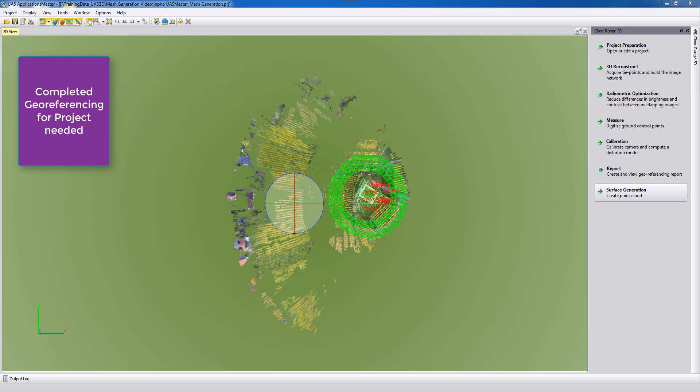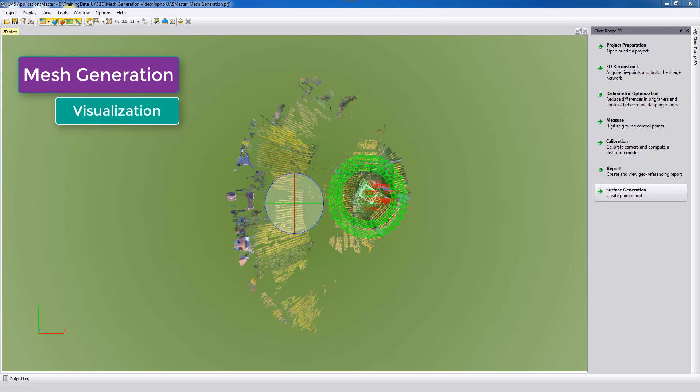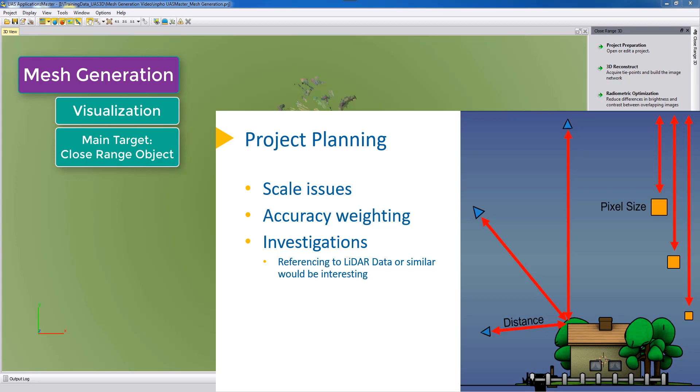The mesh generation is typically extracted for visualization projects. Often we have an object of interest, so we don't fly it as an area mapping project and want to cover as much space as possible, but we fly around an object that we are interested in, and we fly with different heights and scales, and therefore our photos have different ground sample distance.

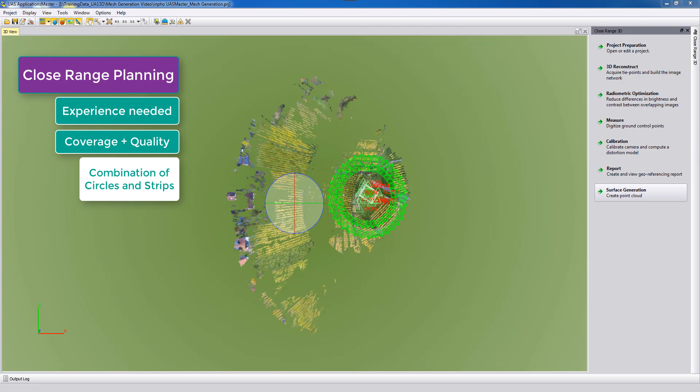Most of the planning software you have for the drones have good planning for area mapping, and also you can just run a circle and define an object in the center that you want to fly around, but coverage for these objects and also quality is in most cases not given, so you need experience how to define your flight circles, your distances, and also at what degree you always will take photos.

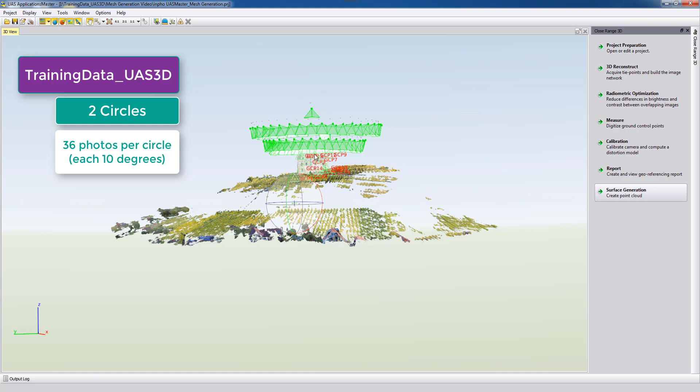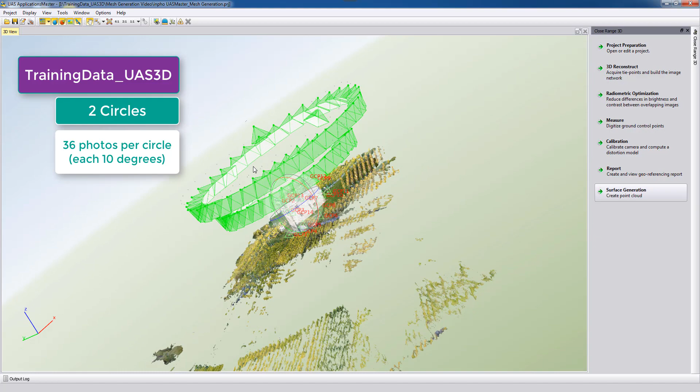In the demo data that we use here, the training data UAS3D, we can see here a castle, an older one, and here we see it was flown with 2 circles and on different flying heights. We can also see here that some of the photos are closer to the object, some photos are further away from the object. We also have a couple photos here just looking nadir to the castle, and also with different angles they are looking at the castle itself.

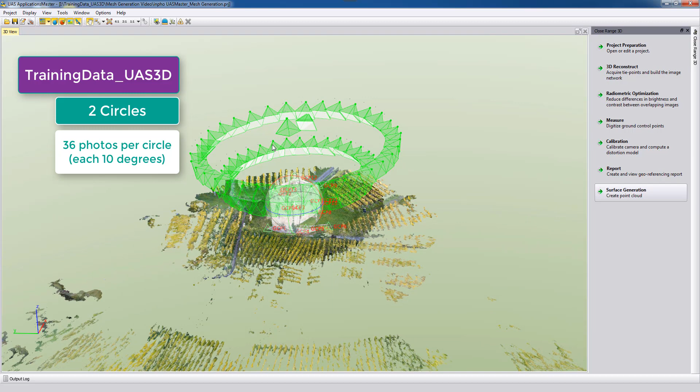For example, here at every 10 degrees one photo was taken, so if we have 360 degrees for a circle, we have about 36 photos in this circle, and then we have again 36 photos in the lower circle. In general, we recommend to have a very large overlap between the photos.

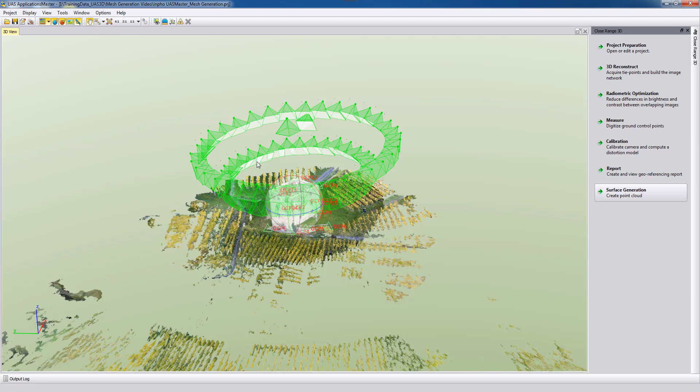And depending how complex the structure of your interest object is, you even can consider to fly with even more photos during a circle. So instead of 10 degrees, you take a photo every 5 degrees. So you would then end up with about 72 photos in one circle and 72 photos in the second circle, just that you have more views for the point cloud generation, and also later on from there to generate the mesh.

In the surface generation for the mesh generation, we are using the model type Surface SGM 3D, which is for our close range projects, like the training data UAS3D, the only option that you have here. Mainly, as mentioned, this is not about area mapping, but about an interest object, a close range project, and therefore we assume you always will have oblique images here.

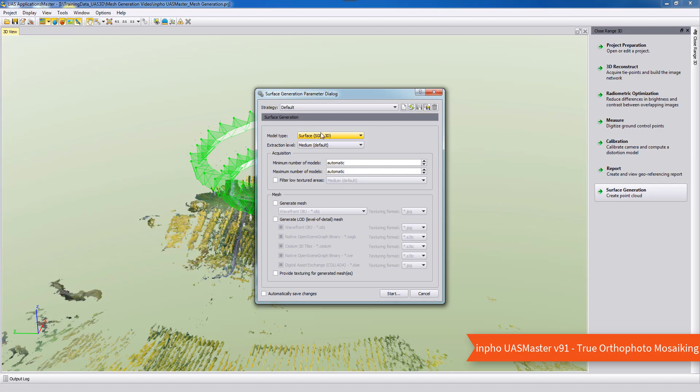In the previous video about area mapping and true orthophoto, I mentioned that we are doing some filtering on the point cloud and also some edge enhancements. This is not part of the SGM 3D algorithm, so we will not automatically also extract true orthophotos for this SGM 3D process, because we assume you have oblique images and you are not just looking straight down.

And true orthophotos typically represent an area, a map, and in our case with an object, we don't have a map. We have facades from different viewing angles, from north, south, east, west, looking down, looking from the side view, perspective views. So therefore, the true orthophoto is not our main target in our close range project. Our main output targets will be the point cloud and the mesh.

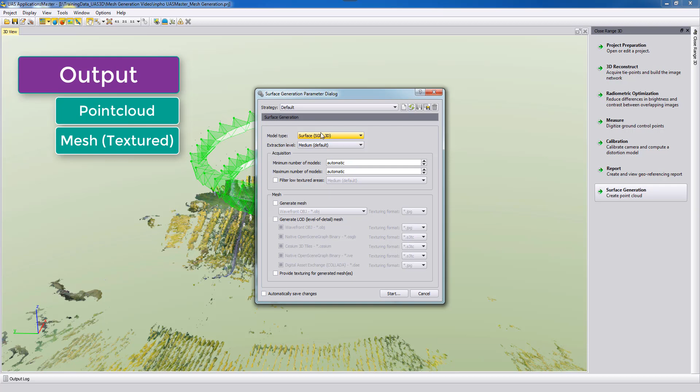And therefore, to have a nice homogeneous mesh, which is a textured mesh using image content, we also recommend to run the radiometric optimization. I can just show it here. Here we do some radiometric corrections on all the photos. It will use the intensity, color information, and also the brightness information.

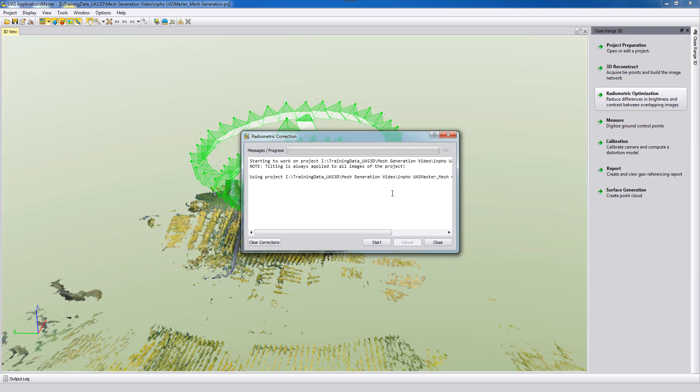It will check for vignetting in the photos and automatically make corrections to all the photos, but not in a physical way. It will store them as metadata, as RDX files, which are stored in the same folder as the photos themselves. So I will run it here and just speed up the video.

Here we go. We finished our radiometric optimization and we can go to the surface generation. In the extraction level, we can select on which pyramid level the point cloud generation will be processed. So in high, we are using a 1 to 2 level photo for the point cloud extraction. In medium, a 1 to 4 pyramid level, and in low, a 1 to 8. This is for the acquisition of the point cloud data.

When you run the extraction level on high, you will need to have at least 16 GB of RAM. If your computer does not offer 16 GB, you have to reduce the extraction level to medium, where you will need to have at least 8 GB of RAM. In my case, my computer only has 12 GB RAM, so I will run the extraction on medium level.

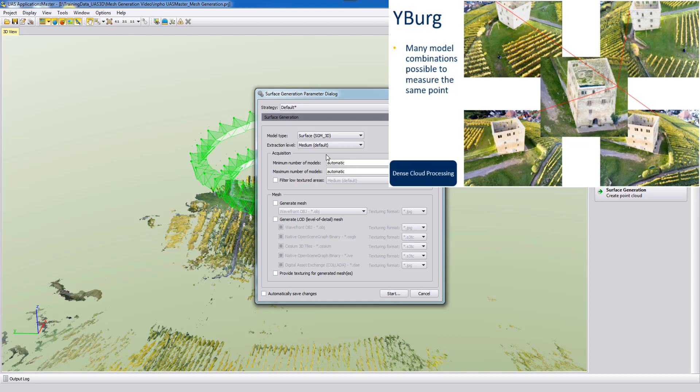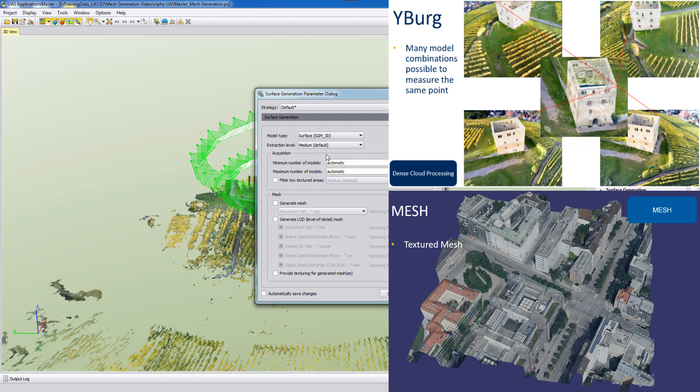And this will then extract a better model where we can then run a triangulation on top of it, the mesh. And in the mesh with these triangles, we will then extract for each triangle the image texture from the photos. And this will then create also a better looking textured mesh.

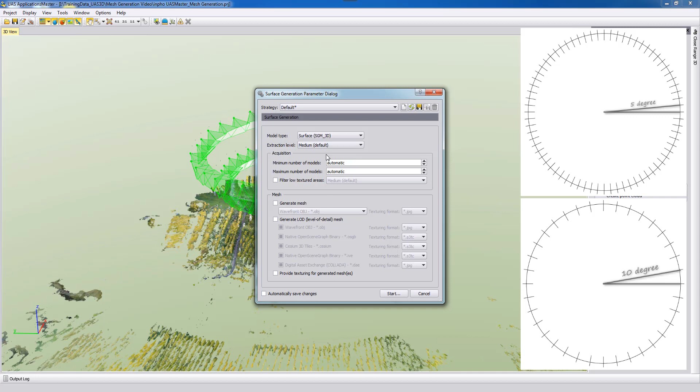As mentioned before, to achieve this, you will then have to fly perhaps more than every 10 degrees a photo in one circle. So instead of having 36 photos in one circle, you would need to have 50 or 70 photos for one circle. And also perhaps not just fly with 2 circles, but even with 3 or 4 circles, or even combine 2 circles with a flight pattern like an area mapping on top of it, so that you have straight lines going on top and then some circles around the objects.

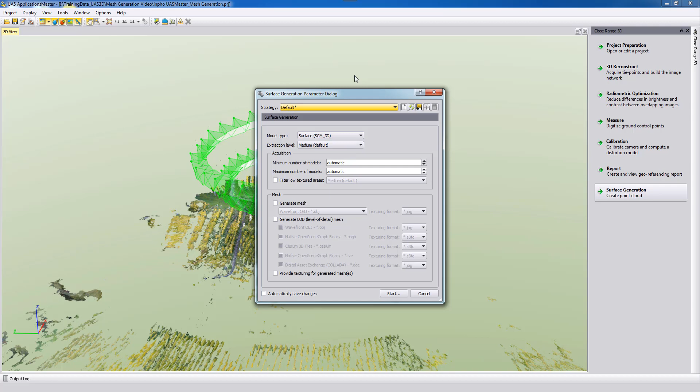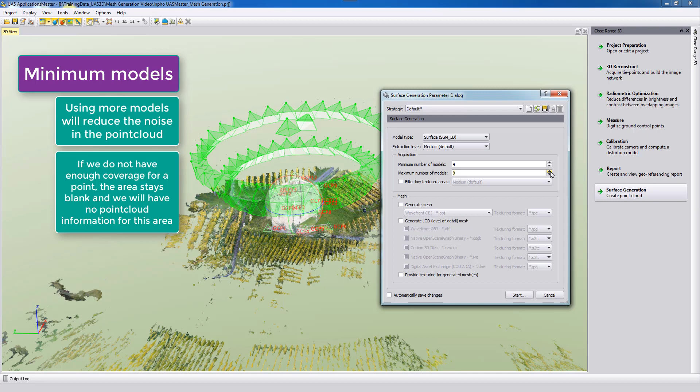In our case here we have a very straight looking castle with the walls having no complex structure. So here we can easily increase the minimum number to 4 models, and we will still have enough points covering these parts. And typically we say to use a twice as large value for maximum. So when I use minimum with 4, I will increase this value to 8; by default, the automatic value is 5. So we can here extract points more easily.

In our case, some of the photos are looking not only at the castle, but into the background, and we can see the sky. And therefore we will use here this low textured area filtering. This is an image analysis algorithm that looks for sky areas or low textured areas. It will mask them out, and then we will not even try to extract a point cloud in these areas. We have here a medium amount of sky texture in the background. Therefore I will leave the default setting.

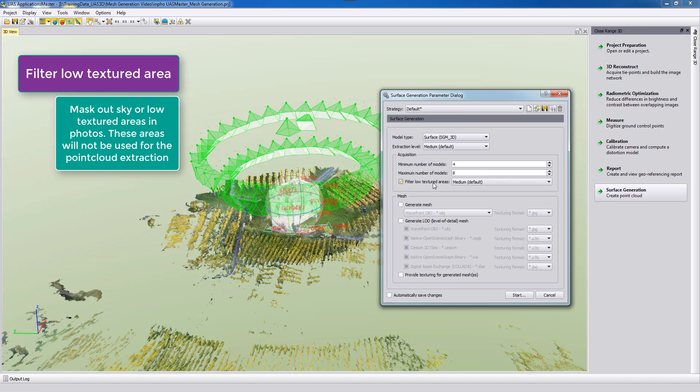If you have very oblique photos which are seeing a lot of sky in the background, then you can increase this to high. Or if you have only a couple images looking into the sky, or perhaps you have some water area in the background, then you can keep it to low. Or if you don't have any sky, then don't use the filtering, so you will not mask out areas that you will perhaps need. All these settings here are just for the point cloud.

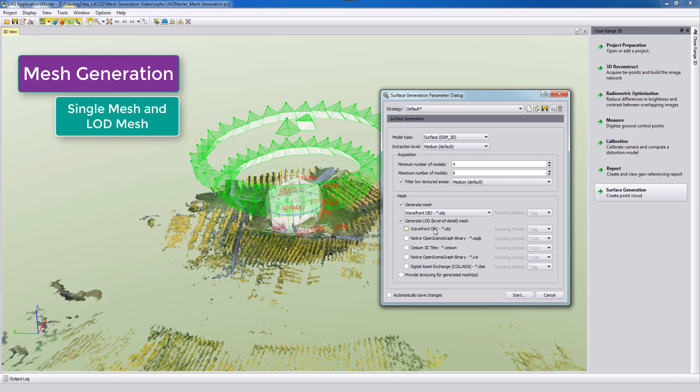Then we have here a second output part, which are the meshes, and we are dividing this into 2 different types of meshes. We have a mesh that is generated for the whole project in one single file. This is possible as an OBJ or as a Collada output. And then you see here, this OBJ also exists in a LOD mesh format, but this one is tiled. So we cut the whole project into blocks, and these blocks are always calculated seamlessly to each other. We cut this into 400 by 400, 1000 by 1000 or 2000 by 2000 pixel sizes, and therefore we can handle larger areas in a good way.

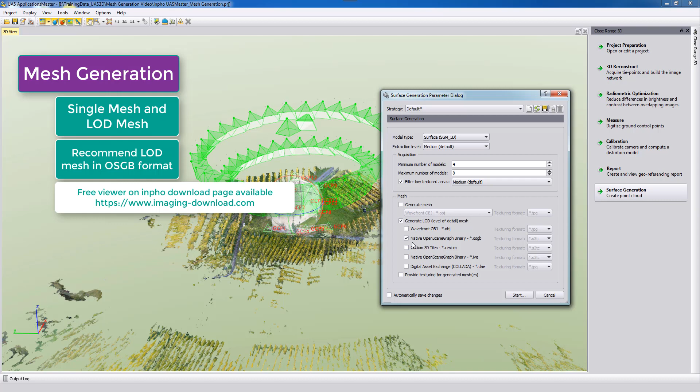Typically I would recommend just to run the LOD meshes, and typically always with the OSGB. We are offering for this format a small free viewer that you can download from our download web page, and you just need to register. After you downloaded the zip file for the viewer, you can take a look into the README file, which explains how you can use it.

The mesh itself, it's like a triangulated mesh, is not including the texture. At the beginning it's just extracting from the point cloud the mesh. There are some corrections done during the process to eliminate extreme errors, and also to remove some peaks, and also to look for when you have multiple models looking on one point, which one of the points fits the best for our point cloud, and then from the point cloud to the digital object model, to the DOM, and then from the DOM to the mesh.

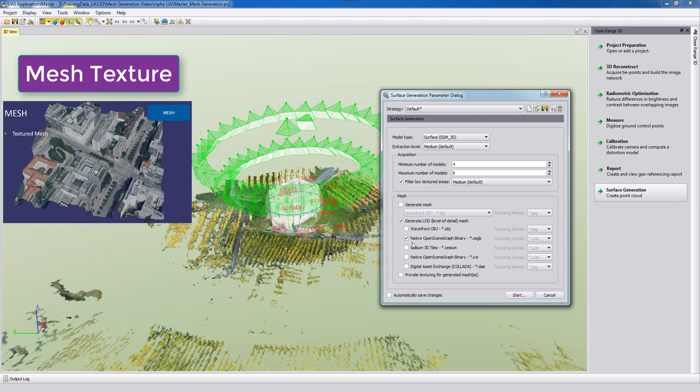But when the DOM is then created, we can look at the triangle itself, and we project it back into the photo, and then we take from the photo our photo content, which is now radiometrically optimized. So hopefully then we have a homogeneous radiometry for our mesh. And this will be done by saying provide texturing for the generated mesh. And this is then the colored mesh. If you don't have this, then you will just have a shaded relief on top of your mesh, which is still then showing you the model in a perspective view. But with the texturing, of course, this is looking much nicer.

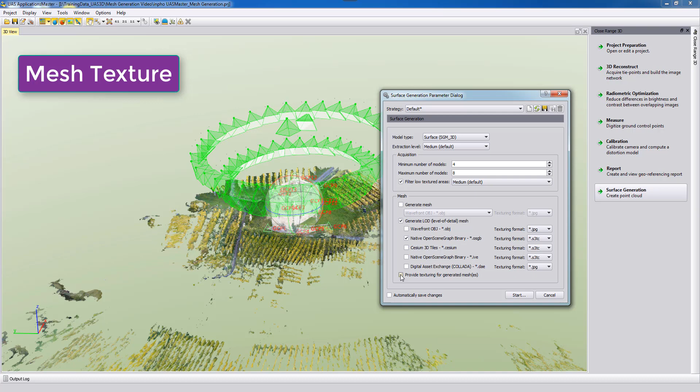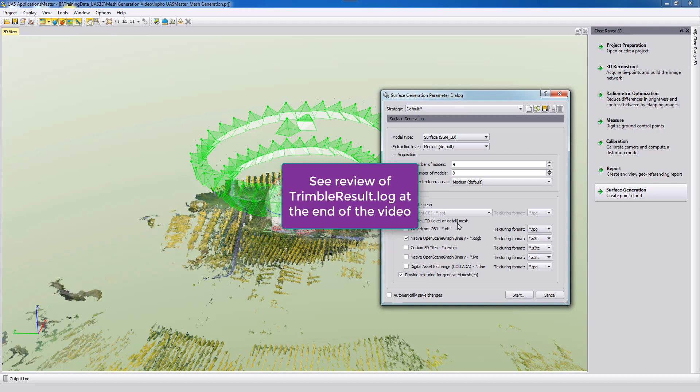As mentioned, the texturing for the generated mesh is going to the original size of our photos, and therefore if you activate this function, it looks much better, so I would recommend it. But it's also the most time-consuming part of the whole process. So I would say here 40 to 50% of the time is going into the texturing in our whole process here. The mesh itself is also a time-consuming part, and we will look then in the end on our statistics, and we can then see how much time was spent for this part.

It is also possible to output multiple formats, but of course this will take time in a similar way like extracting the texture and converting it to the format that you need. Typically they have different data structures, so we need here also to take care to provide them in the right way. In our experience, you have to be careful about standardization from the different formats. So not every Wavefront OBJ format is the same as the next one. It depends where you define your local coordinate system, where your X, Y, and Z axes are pointing to, and there are also many more things to be considered in this whole process.

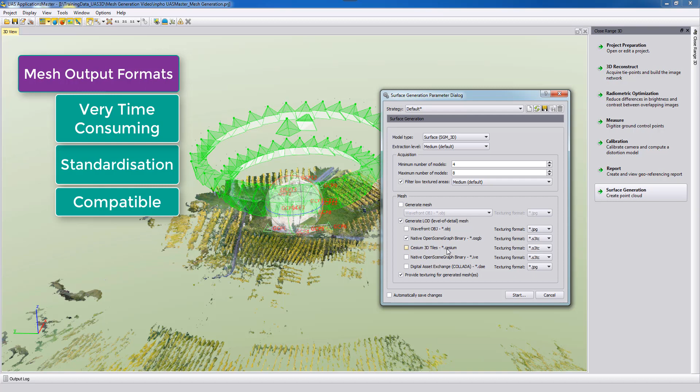So therefore, unfortunately, we cannot go through all the cases here, and that's why I also want to recommend the OSGB format, because we can run it with the free viewer from our download page, and so you will always be able to visualize it. In case you want to run it through the internet on a web-based structure, then we strongly recommend you to use Cesium. Here you would need to go to the page from Cesium. They are offering a large package also for visualization on the web.

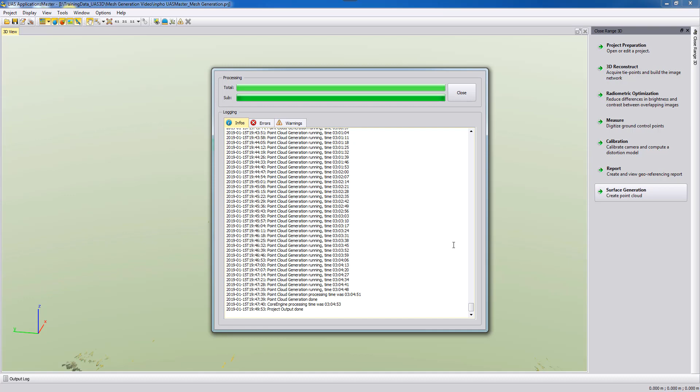I will start the process now, and after it's finished we will then take a last look at the result and take some views on our output format. Here we go with our processing. It's done. So let's take a look now at our output folder. So when we open up our project, I generated here a subfolder mesh generation for the video, and here we have now the point cloud that is written directly to the project folder.

Additionally, we have our temp folder, which was defined in UASMaster here in the options preferences. You can define your working directory, and here it's defined for us in the project directory. So here we will define this temporary folder. By default this is set to the system's temporary directory, or you can also define your own directory where all your results would also be written.

Be aware that the temp folder is always overwritten from step to step. If you run the 3D reconstruction, the temp folder is cleaned up and filled with the 3D reconstruction information. If you run the surface generation, again the temp folder is cleaned up and filled with the surface generation files. In our case, we now have this UASMaster_engine_temp folder.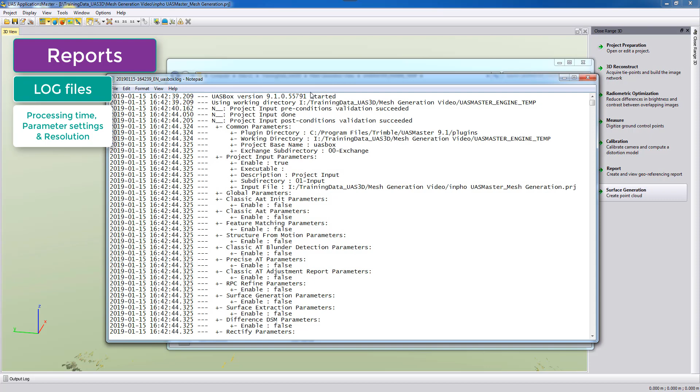When we open it up, we can see here our log file. It's a time-based log file explaining all the different steps that have been done. Then we have the folder called 21-Pointcloud.

Here we want to take a look at the Trimble report log file. As mentioned, we want to look at our processing times, which are at the end of this log file. The texturing part is taking the most time.

We see here the 3D mesh without the texture, just the triangulated mesh, is 11% of the time, so 21 minutes, as we ran this on level of detail 2, pyramid level 2. We can see this on the upper part, showing that pyramid level 2 was used for the point cloud generation.

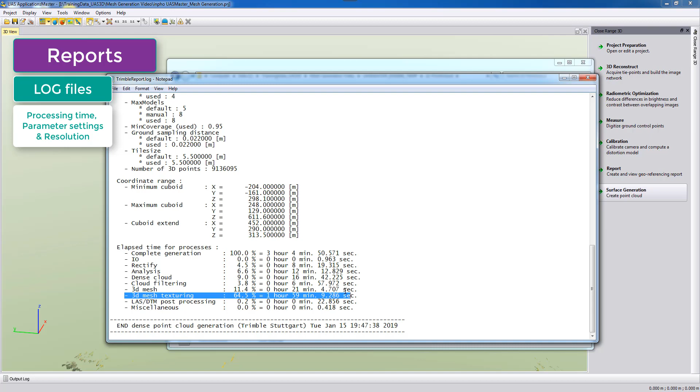The texturing is more time consuming, and here it takes even 64% of our time. We can also see our manual settings that we defined, a minimum fold of 4 and a maximum model fold of 8. This is also stored here in the report file.

Looking further down in the protocol, we can also see that our ground sample distance is approximately 2.2 centimeters for our data, and the tile sizes for our project are 5.5 meters by 5.5 meters.

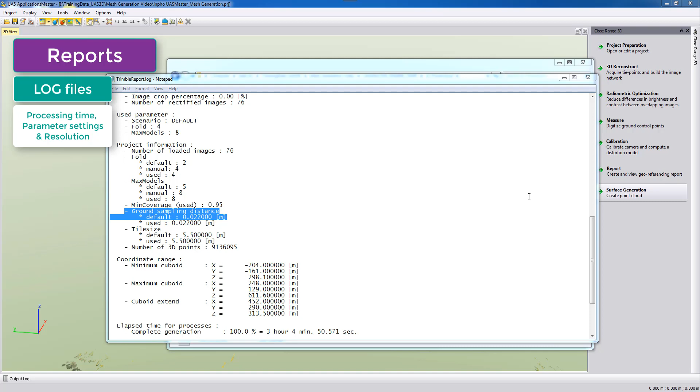Let's take a look at the result from the mesh. The mesh is in the subfolder 3D-mesh, and we defined OSGB for output, so here we have the folder OSGB. If you additionally select to extract an OBJ or Collada export, you would have additional subfolders for each format.

The OSGB is then defined in these 5.5 meter by 5.5 meter tiles. These are exactly these subfolders here, so each one represents one tile of 5.5 meters.

When we scroll down, we see a file called main OSGB. This is the organization file, which we will then use for visualization with the Open Scene Graph viewer.

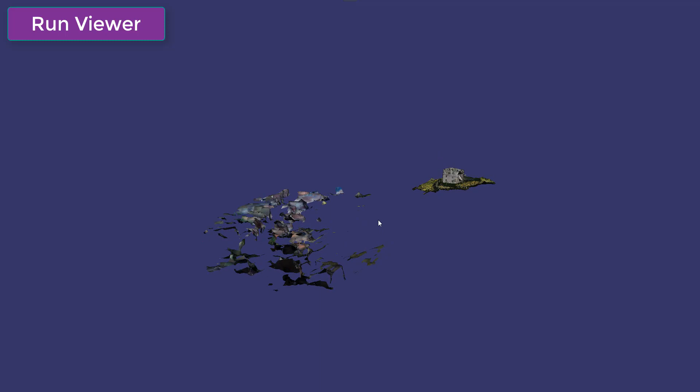I removed the backslash, not a good solution. Here it is. Okay, hopefully this will now make it. Let's see, file, save, and then we can double click this one here, and it will automatically find the main.osgb part, and then it loads in the free viewer your mesh, your textured mesh of our result from the product.

We can see here there are even more data extracted in the lower part, but we are only interested in our castle. When you hit the H button on your keyboard, you get your shortcuts. Typically the L button is a very important one, it lightens up everything. With your wheel mouse you can zoom in and out, and with your middle mouse button you can pan.

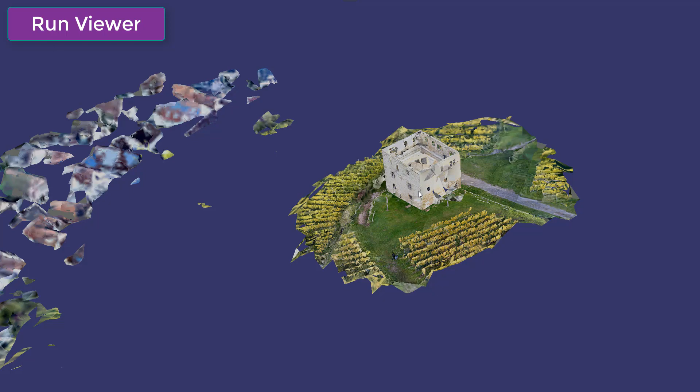If you want a higher resolution, since this is the level of details, you can use not the backslash but the slash button, and when you hit this multiple times, it will increase the resolution, giving you the highest resolution part with the highest texture. When we now zoom in, all of a sudden it's not looking so bad, it's looking very nice with a high textured part. I hope this helps for the viewing part.

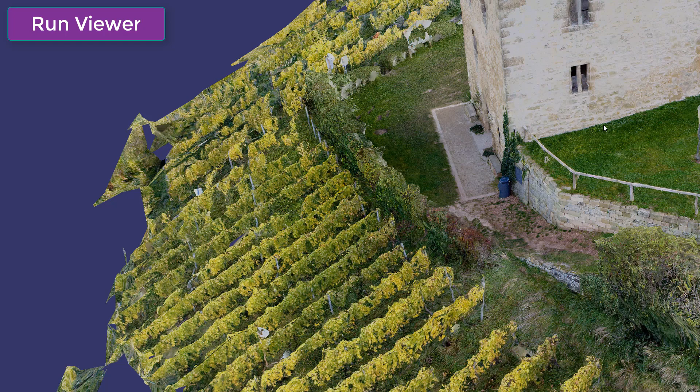If you want to use your point cloud data, I will just close the viewer here. You can also run with TBC the whole part. So you go here to your project, and this is then done with send to. Export is really just when you need a third-party product, not TBC, and send to is really sending this data to TBC. You can also export your ground control points, but I will not do this.

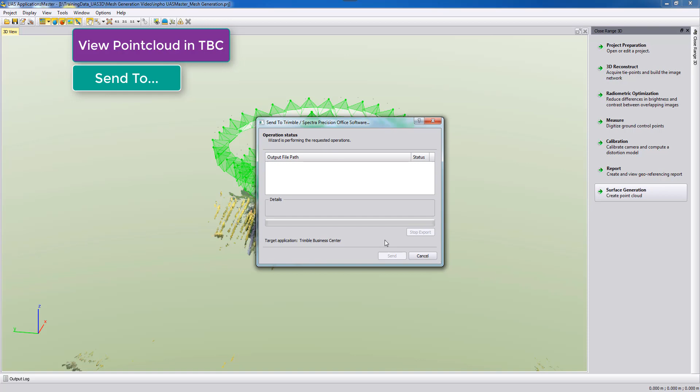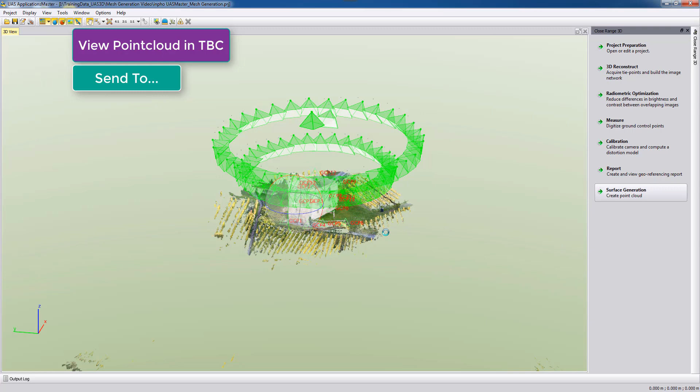I will just export the point cloud, and then we say that we want to run Trimble Business Center. You need to have Trimble Business Center installed on your computer, and it is supported now with the new version 5. So we can send it, and then it opens up TBC and directly loads it. I have TBC 4.1 installed on my computer, but it will also run with 5.0.

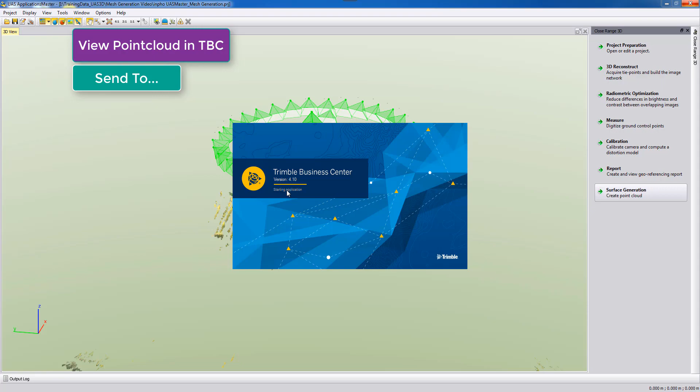After Trimble Business Center verifies the license and receives our data, it will ask to confirm to import the data into TBC. Until this happens, I will just pause the recording here.

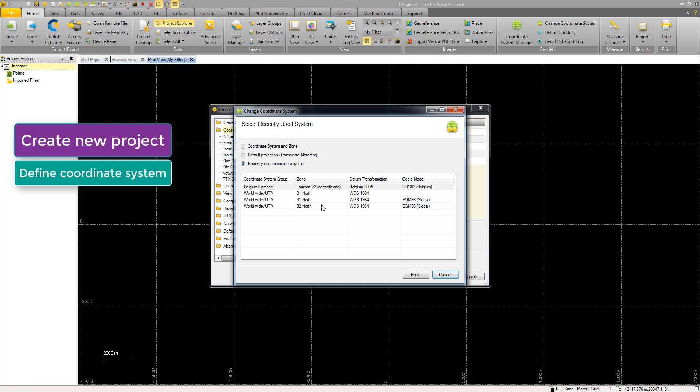To import the data, we will define in Trimble Business Center a new project, and in this new project we will define a blank template where we will now define a UTM-32 North coordinate system in which the data can then be added for our visualization. So we go to the unnamed project settings, and in the project settings we can go to the coordinate system and define that our coordinate system will be WGS worldwide UTM-32 North.

So this is then our coordinate system, and then we can go into our process view and accept the import of the data into this coordinate system of TBC, and then we can see our point cloud in this coordinate system. The import is finished, and then we can go into our plan view and make a zoom extents. Here I think this is it, and there we are. We have our data here, and then we can also use a 3D view for this part.

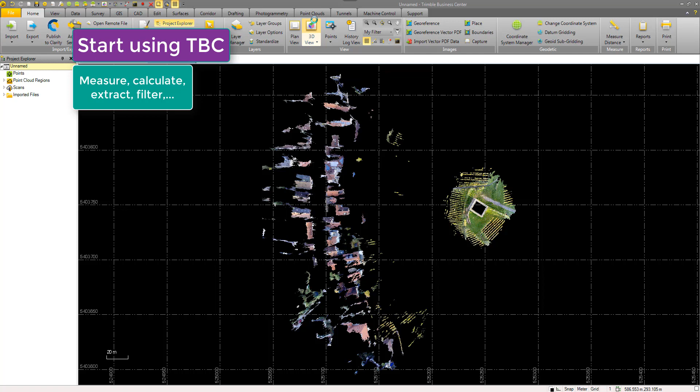I'm not a good TBC user, you might know more than me, but I think this is the 3D view here. We can rotate our view and take a look at the data from a perspective part. With the right mouse button we pan, and with the left mouse button we could have selected, well, not a good idea. With the middle mouse button, yes, here we can rotate the data, and with the wheel mouse we can zoom in to our point cloud.

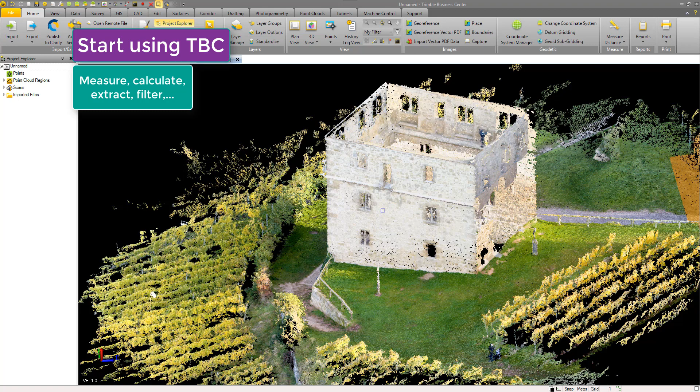And here we start to do our TBC processing. I hope this helps you to work with close range data, with the point cloud in TBC, and with the mesh data using the simple open scene graph viewer.